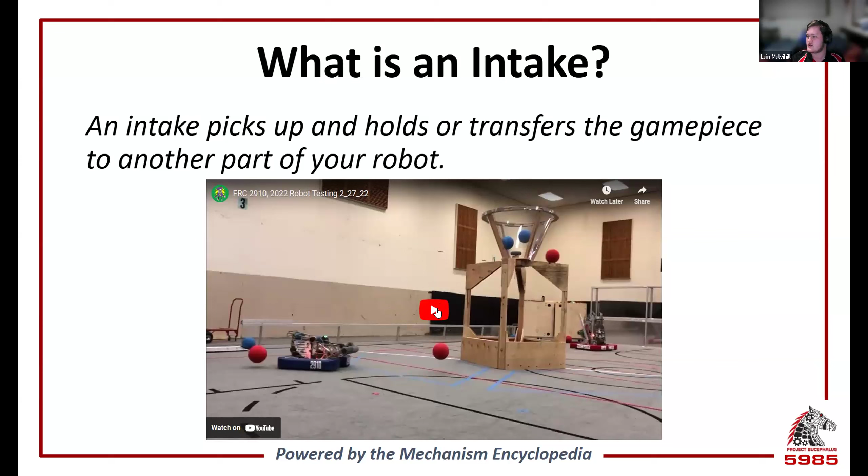Okay, this didn't automatically play, but this is an intake, intaking things off of the ground.

Again, it doesn't want to move on. Okay, now it wants to play. All right.

So today we'll go over some of the theory concepts involved in designing an intake, look at some of the design considerations when it comes to packaging, deployment, consistency, and end on some examples of popular or cool intake designs.

Some of the requirements we'll be talking about are functional and non-functional requirements, intaking from the ground, from the human player station, or not intaking at all. Touch it, own it. So wheels, claws, wide area of intake, active versus passive.

Different wheel types, different packaging types, deployment types, different designs that are going to make your intake more durable, things to improve the consistency of your intake, how you can prototype your intakes, and some miscellaneous notes.

Then we'll go into a bunch of different examples, which are pretty cool.

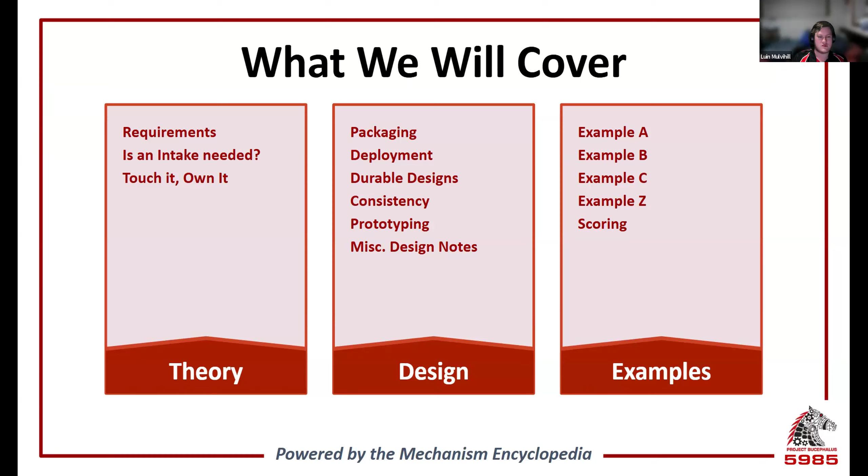All right, so let's first talk about establishing requirements, because you can't really design an intake or any mechanism for that matter without knowing what you need from it.

On day one of build season, when you first receive the rules, how do you go about this? First, you're going to need to figure out your game plan. So look for clever ways, or just the best way, of maximizing points, including ranking points scored, while keeping within your scope, which are the realistic boundaries of what your team can design and build with the resources, your people, skill sets, time, budget, etc. that you have available to you.

Then, following that game plan, we need to define what your robot needs to do, not how. So you're defining essentially your acceptance criteria for your solutions without trying to overconstrain your design. So here, consider the statements: we need to get the game pieces from the ground into the goal, versus we need a claw, right? Just notice that this is when you're discussing overall robot strategy.

We'll go into intake-specific requirements in the next few slides. This first sentence here is talking about what your robot needs to do in order to perform part of your game strategy and doesn't actually limit your design, while the second sentence goes straight into using claws without considering the other methods, which at this point in the build season, you probably haven't had sufficient time to rule out all the possibilities.

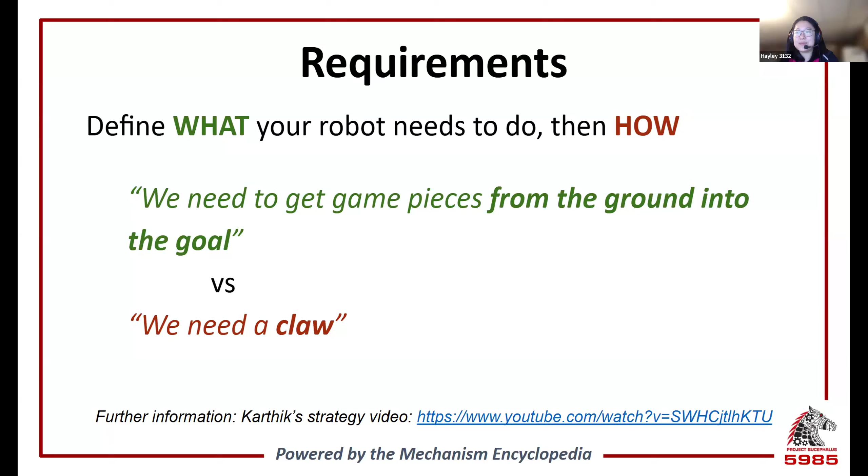So, once you've determined the what's, let's now talk about the how's. This is done via establishing your functional and non-functional requirements, which are kind of like the qualities of your robot.

As the name suggests, functional requirements define the functionalities and features of your mechanism. This usually depends on the game, and a little by the other robot decisions that you may have made so far when you're discussing your strategy.

When you're designing intakes and deciding what it needs to do, the main considerations are: one, game pieces. So what are their physical properties? How many do you need to worry about at any given time? You need to be designing a mechanism that can obviously control and intake the game piece, taking into account the shape, size, weight, etc. You also need to be considering how many you need to control at any given time. How many can you hold? Do you expect to need to intake multiple at the same time?

That one feels like a pretty obvious functionality, right? The second consideration you need to look at is the location that you're expecting your game pieces to be in. Once you've figured out your strategy from earlier, you probably also know where you want to be getting your game pieces from. For example, the feeder station or maybe an auto where the game pieces are located, whether it's from the floor or from an existing game structure.

But when you're looking at intaking from the ground, you also need to think about: is it going to be an open field, or are you going to be intaking right up against a wall, maybe even in a corner? Your intake design is going to change a little depending on what you want to be capable of.

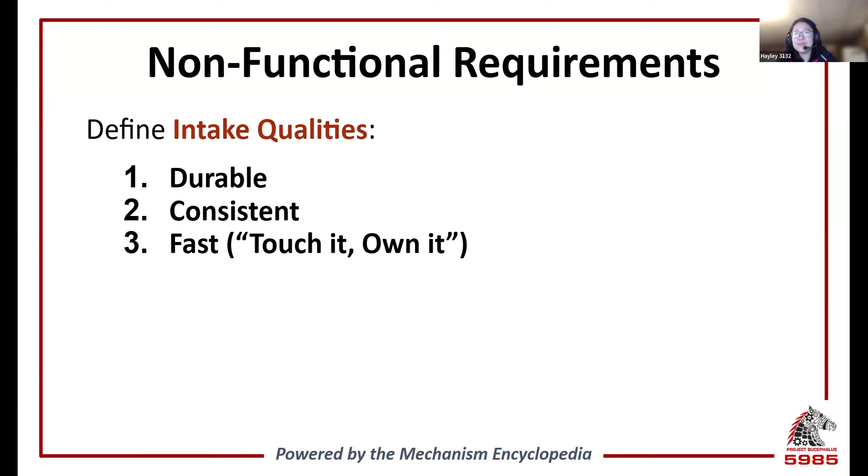Before we dive into the specifics of intake design, let's quickly talk about whether you need an intake at all. A few slides ago we talked about needing to establish a game plan—the strategy your robot is going to be designed for. One of the things you need to identify is what you'll be scoring and where you can get the game piece to score. Usually every season you can access the game piece from the ground, and these are the intakes we'll be focusing on today.

But they're not the only ones. Human player stations are locations on the field where you can load your robot in a relatively controlled manner, and something you see every year. Just note that this can also work with ground intakes—if you just drop the game piece on the ground, usually your ground intake should be able to handle it.

There are some exceptions to loading from the human player stations. For example, I think in 2016, the human players essentially had to bowl it down a lane for the robot to then pick up from the ground. So there was no option for you to load it in from the top.

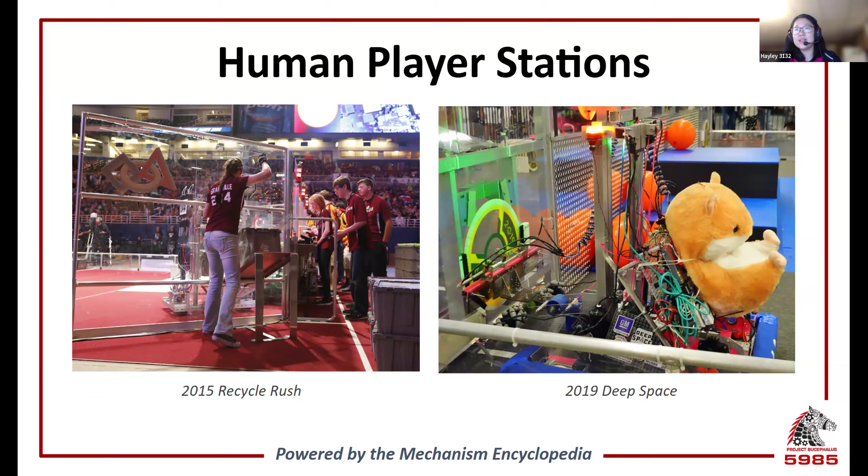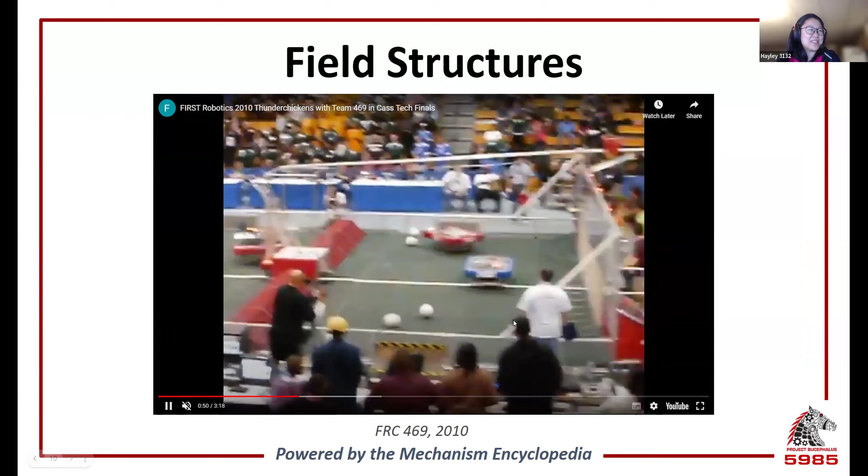But then in the case of 2010, only one team chose to get their game pieces from the field structures. This is a very clever robot that really didn't build an intake. See how the ball is falling from the ramp at the top into their robot, which was essentially just a ramp, and they scored it that way.

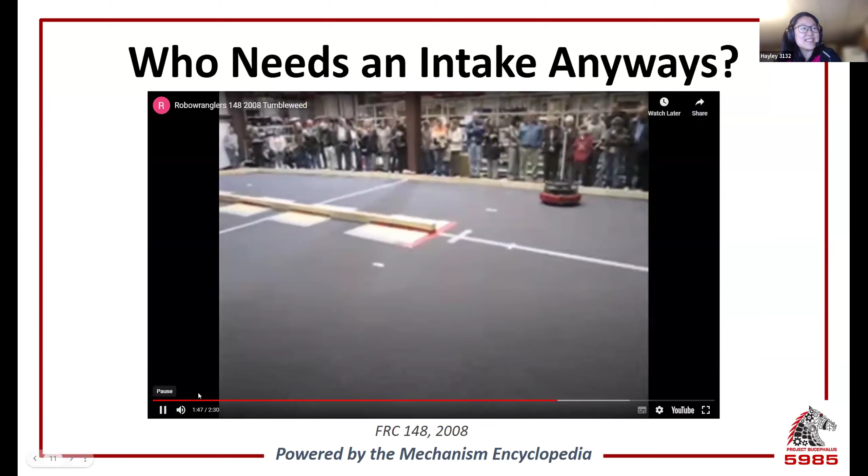So that's all well and good, but one year, one team decided to just build the fastest robot possible and not bother with interacting with the game pieces. 148 in 2008 decided to just drive around the field for the entire match, which was actually one of the ways that you could score. Yeah, and there it goes.

So the point of talking about all this is just to make sure you understand your game plan before jumping into designing an intake. They are a very common mechanism that you will see almost every single year, but they are not always needed, depending on your strategy.

Now, let's talk about intakes. The first concept we're going to talk about is this concept of touch it, own it, which is one of the most important intake design rules. You want to be able to drive at the game piece and end up with it in your robot or in your control. This means that as soon as your robot contacts it, it owns it and cannot be stolen by another robot or lost to collisions or anything.

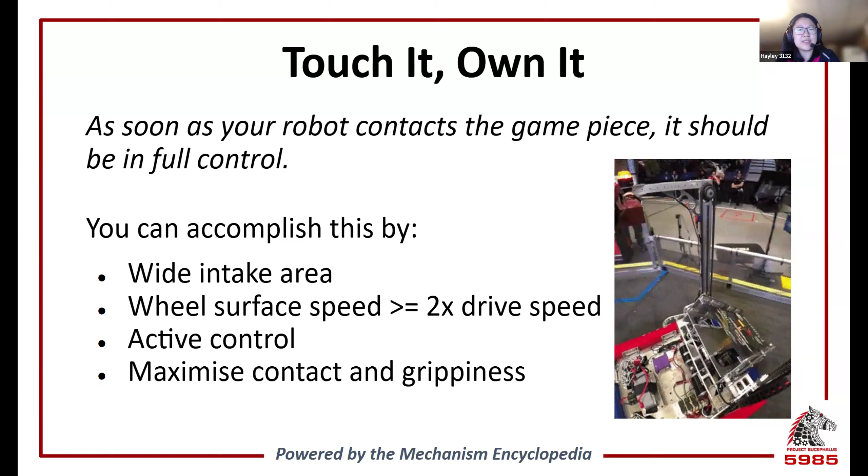We're going to explore 4 different ways that you can achieve this. One, we're going to look at having as wide of an intake area as possible, ideally the whole width of the robot. We're also going to look at the ideal speed of your intake, which is that the wheel surface speed needs to be greater than or equal to 2 times your drive speed. We're going to look at active control of your game pieces from the first moment of contact, and we're going to look at using wheels and rollers to maximize your contact and grippiness.

This first point: when you design an intake, you want your intake to have as wide of an intake area as possible, so that your drivers don't need to waste time and mental bandwidth on lining up to the game piece.

On the right here, notice how we have 2 different designs. That first one is a top roller design, whereas the second one has the wheels on the sides. Notice how it's much harder to get a wide area of intake with your side roller intakes.

But it's still possible. In this example, it's sprung with surgical tubing to widen the outer intake wheels when it's in contact with the game piece, which in this case was a milk crate. Luin is pointing out where the surgical tubing is, sprung from here all the way back to the frame. As these wheels make contact with the game pieces, they ride up the game piece and open to the width of the cube that year.

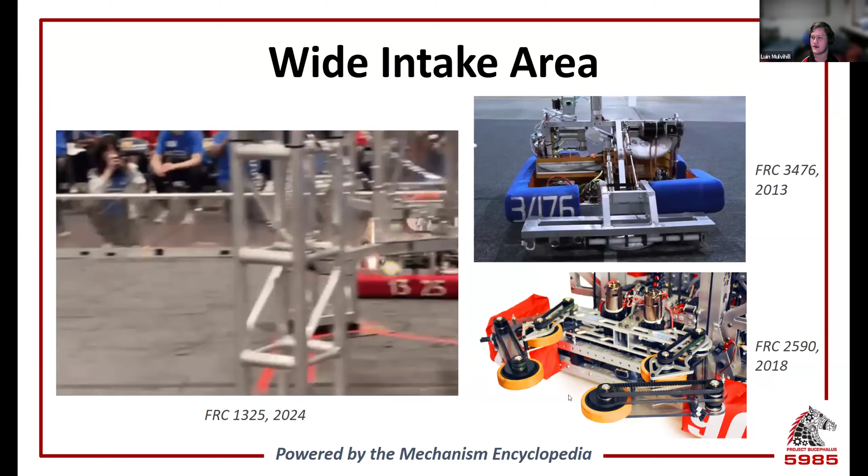Yep, exactly. But the whole idea of this is that you should be able to drive at the game piece's general direction and be able to have it in your robot.

The one problem with full width intakes is that you most likely need to center the game piece or index it in some way. Having the intake be the width of a single game piece means that you require more driving accuracy, but you don't need to index. So that's a thing to think about, but we'll look at some ways to index your game pieces in a moment.

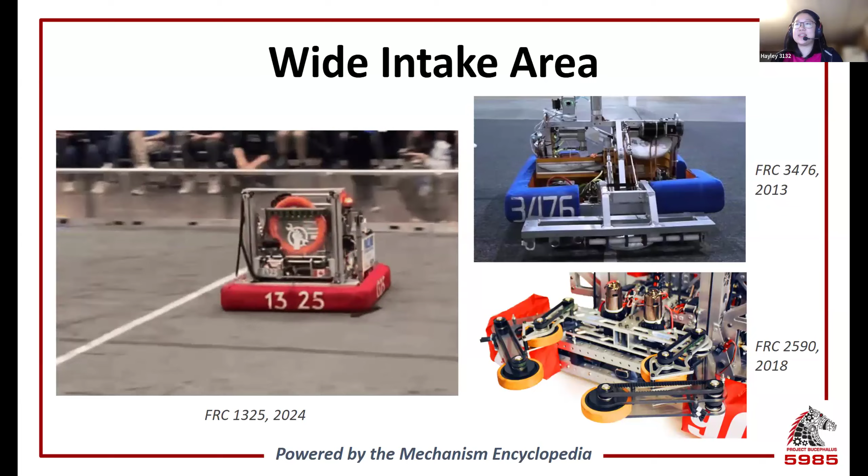The next thing we're going to talk about is this rule that gets quoted way too often, for good reasons, which is that your intake surface speed needs to be 2 times your robot's drive speed, at least. This applies to intakes with a top roller, to ensure that at all points in time, even when you're driving forwards at your top speed, your intake can still operate.

When you drive into a game piece, you want to make sure that the game piece is rolled towards and into your robot instead of your robot rolling over the ball.

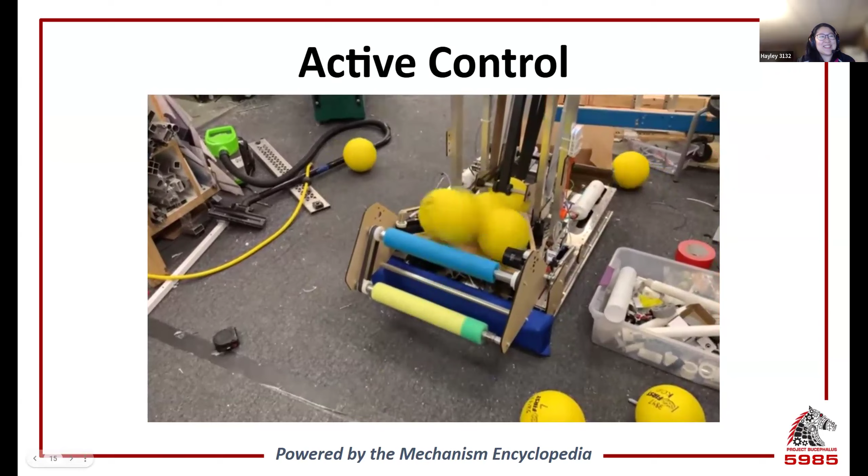Let's take a look at this video, and it should show you exactly why. The intake's working great, but the balls are going a little bit all over the place. Obviously this is just a prototype, I don't expect the end robot to be like this, but it shows why we need active control over the game pieces. We really don't want to design a perfect intake and then lose game pieces all over the place.

This is the last point out of the 4: compliance and compression. Along the same lines as active control, the last thing to consider when designing a touch-it-own-it intake is how you maximize your contact and grip on the game piece. For intakes to actually control the game pieces, they need to be in contact at all times to be imparting energy. To do that, you need to understand compliance.

Compliance is the ability of a mechanism to flex and adapt to external forces. In this case, it refers to molding the intake to the game piece, or molding the game piece to the intake, such that both are in constant contact regardless of shape, even if the game piece is slightly different in size, slightly damaged, or during high acceleration changes like collisions. This also results in a design that's really forgiving of variations in alignment.

Typically, for hard game pieces like the 2018 milk crates, you want to use compliant wheels and/or add compliance into your mechanism so that you maintain contact. For softer game pieces, teams can start looking into harder wheels or just a singular top roller to compress the game piece instead of the wheels.

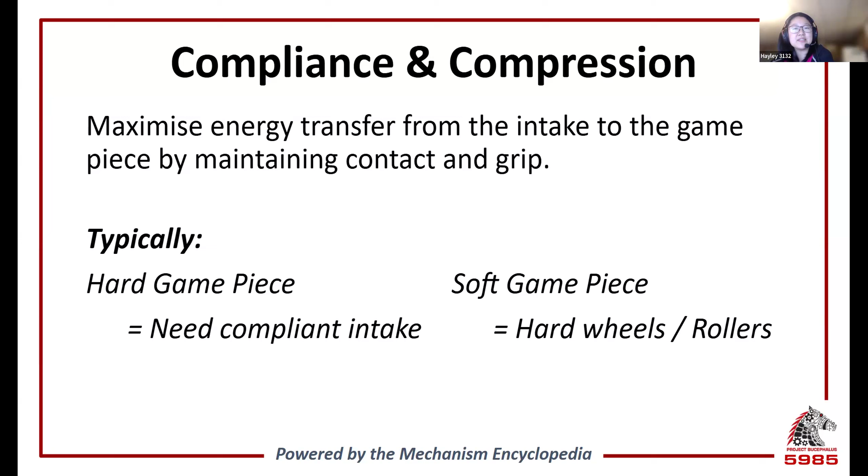One way to achieve compliance in your designs is by making your intake springy. This can be done using surgical tubing to allow the location of the intake wheels to dynamically change depending on the orientation or location of your game piece, while still maintaining grip on it. Here's 148's intake from 2018 as an example, where they can intake from any orientation because of the springy nature of the intake, even if it's slightly on a diagonal.

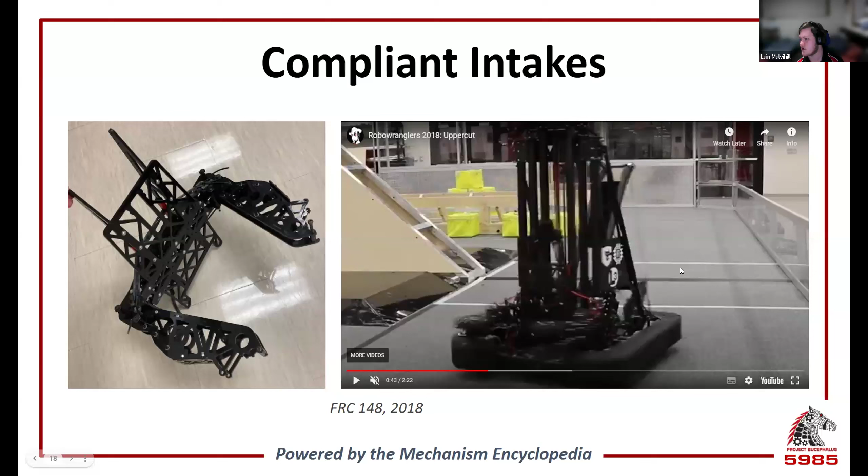You can see that when their intake, their elevator goes up a little bit, their intake is basically unlocked. And so then their arms swing around using that surgical tubing, and then you can see right there, they bounce back. That's the springiness in the intake, and that carries over for when they're intaking the game piece as well. They come in and that intake gets wider around the game piece until it's in its possession.

You can see here again, the intake actually can't be seen at all, and then it pushes its way out around the sides to then suck that cube all the way in, making sure that it owns it and it's not going anywhere. Again, you can see that when it does the opposite and puts out the cube, those intake arms spring back in, back to their original position.

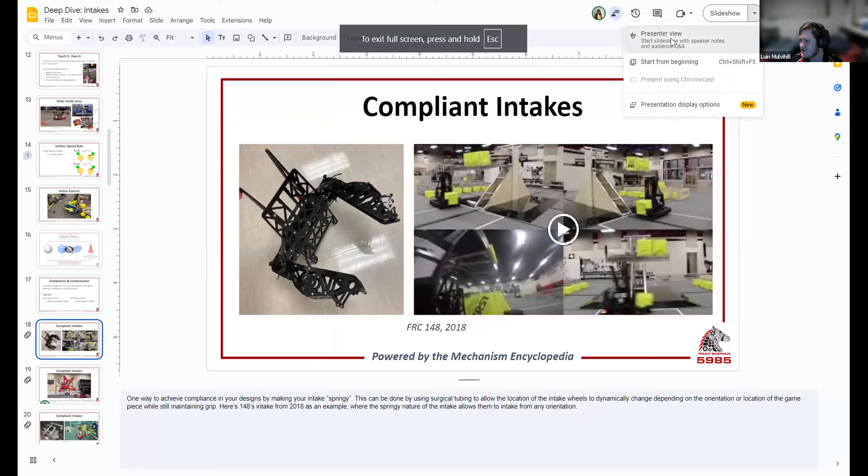Oh, okay, cool. Oh, no speaker notes. Not allowed? Yes. You're good?

All right, so this next slide here is just the same concept, but just showing you that this concept applies to intakes with a top roller as well as the side rollers.

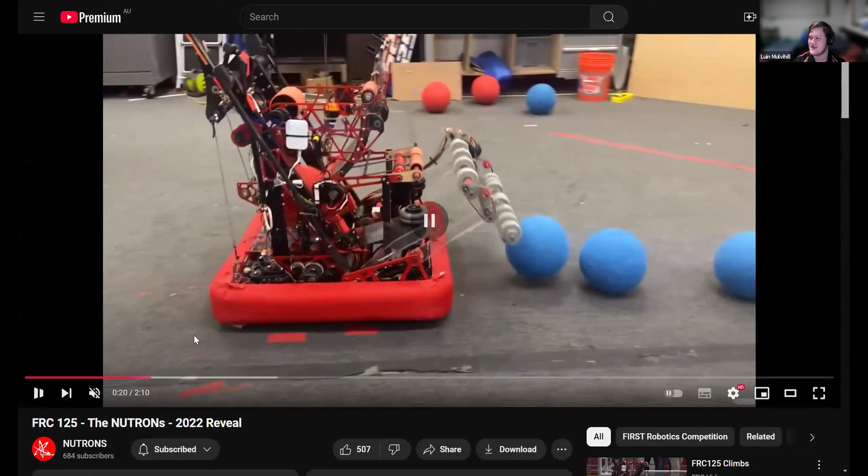So you can see as the robot is driving over the game pieces, it is complying with them and it is lifting the intake up, bouncing a little bit, which probably isn't ideal, but it does get the job done.

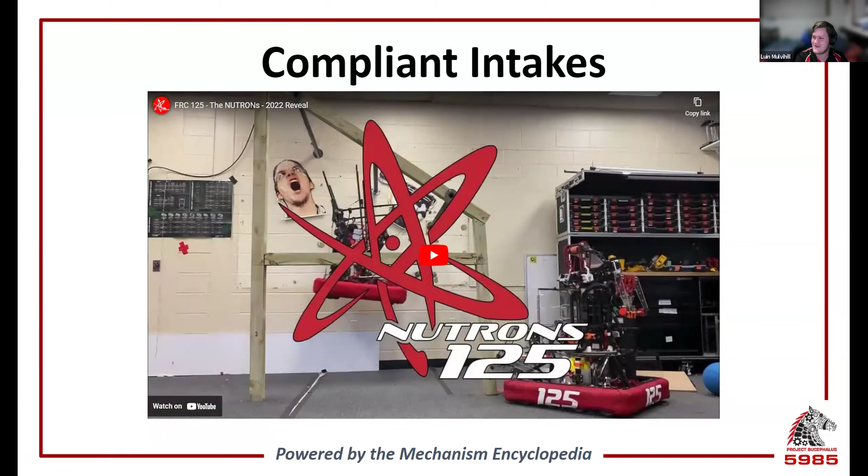I'm locked in here. Okay. There we go. I guess we'll watch it one more time. Thanks, Google Slides. All right.

So this next example here is 118 from 2018, where they are using pneumatics to achieve the same results, where instead of the surgical tubing, it's compressing air that's providing the springiness.

So you can see at the back here in this image, you have, well, there's like 5 pneumatic pistons back here, but these ones and these ones don't actually matter. There's one back here that when that actuates, pushes these arms in and out relative at the front, and then you can see as the game piece is being picked up.

Wait, can I do this? And then

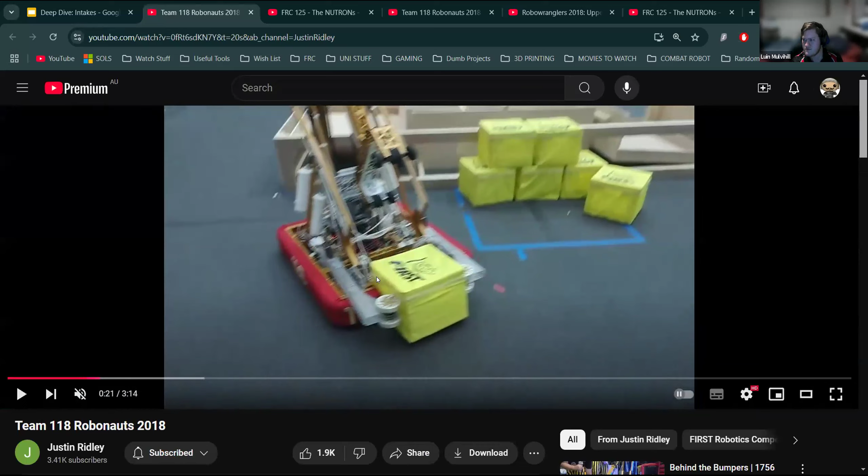As the game piece is being picked up, you can see the exact same behavior as the surgical tubing sprung one from 148. The wheels pop out and back in until it has that game piece right where it needs it and has full control over it.

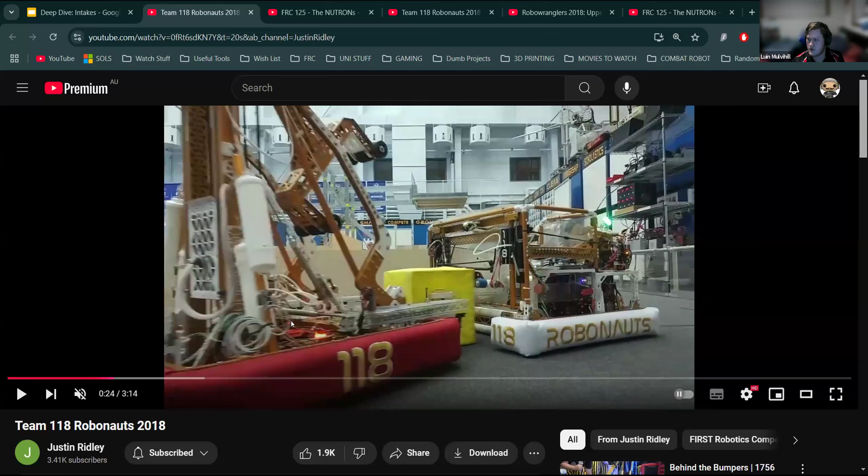You can see again here as it comes in, you can even see the pneumatic piston here in the corner. It's able to spring in and out, and this is because air is still compressible, so it can act like a spring.

Oh, okay, no, cool. I thought I played it from the beginning. Alrighty.

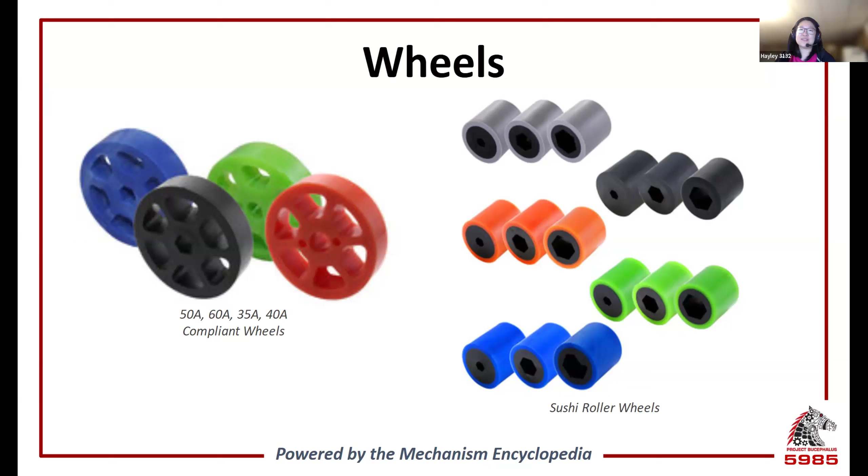So lots of teams don't use wheels for most of their intakes and instead are going to use rollers, which also can have something wrapped around it to increase the grip. This makes for a much more compact intake and lets you have the same reach along the entire width. Whereas using wheels, they are likely spaced out or you're just going to have a really heavy intake. But them being spaced out does mean that some sections are going to have more reach than others, which may or may not be what you're looking for, depending on the game piece.

Rollers are usually made from a polycarb tube, if you see any of the teams from the US. But here in Australia, PVC pipe tends to be more commonly used just because polycarb tubes are really, really expensive here.

I think, Luin, you were looking into some last time, and it was what, 200 for how much? 400 for 3 meters of 2-inch. Yeah, it was not good. Just a little bit too much. Whereas for the Americans, quarter of the price? Yeah, it's like $100 for 6 meters or something. It's nuts.

Unless the game piece itself is really grippy, like the 2020 game pieces, you are usually going to look to coat these tubes to get more grip onto the game pieces. Most commonly, teams will use silicone tubing, which is floated over the tube to give better grip. But in 2022, Velcro and cat tongue tape were the most common coating materials, where the game pieces were oversized tennis balls, and the surface was essentially the hook side of the Velcro.

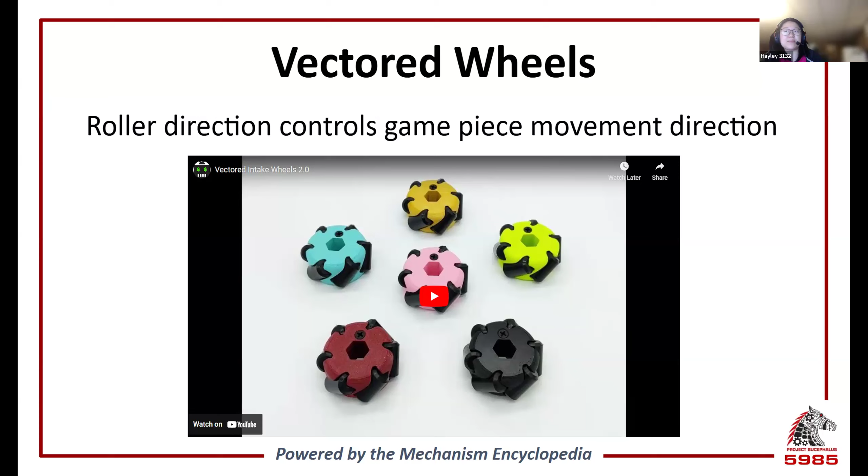Another common part found in intake design is a vectored wheel, which is a special type of wheel with passive rollers at 45 degrees around its circumference. The video should show it, but it'll pull in the game piece towards your robot, and then when it can no longer move in that direction, you'll see that it's pushed in the direction of the rollers. You can orient them so that they center the balls for you, or push them all to one side, depending on where they need to go next.

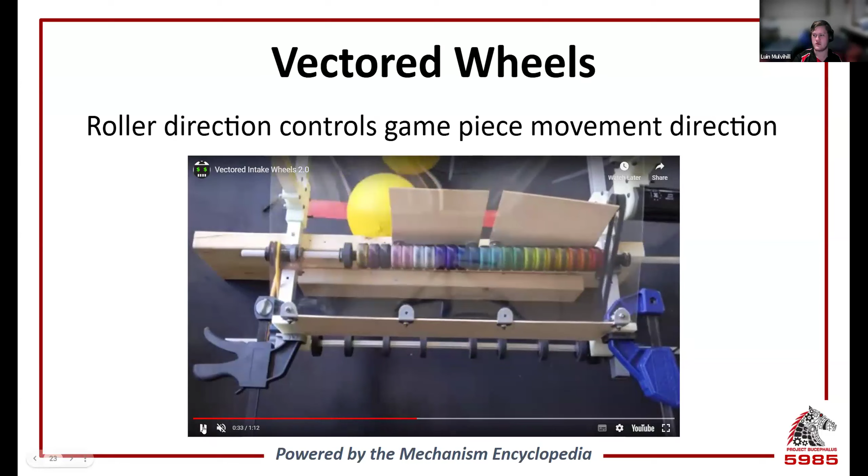So these ones are quite cool. You can actually 3D print them yourself as one part - these are all print-in-place rollers, which are pretty cool. We used them in 2022 to center our cargo, and yeah, they work really, really well.

Sometimes you're going to come across game pieces that are irregularly shaped. You might be tempted to consider claws for them, but remember, you do want to have control over the game pieces as quickly as possible, and it's far easier to do that with wheels and rollers than to try to line up with a claw.

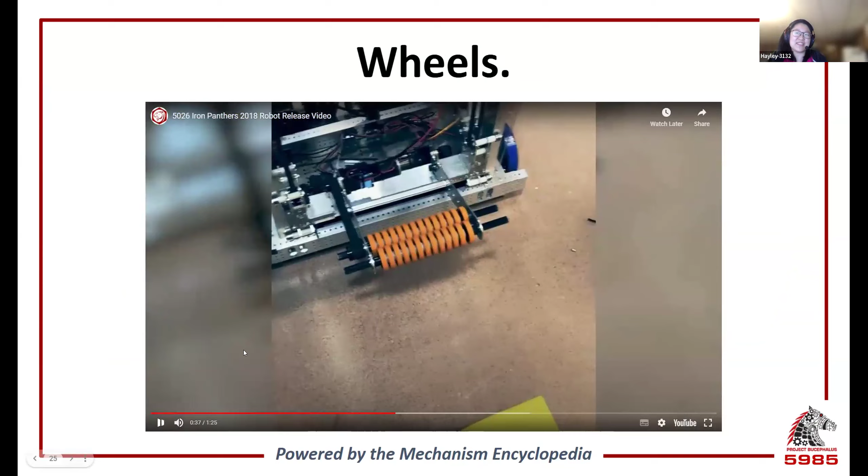And one last thing to try and convince you that wheels are the way - wheels can do some really cool things. When it came to 2018 with the milk crates, most teams built intakes with compliant wheels to grip onto either side of the crates. Some teams chose claws, and some teams used wheels to pick up the crates by pinching an edge of the crate by its fabric, like this one.

This unconventional style of intake allowed them to have a much lighter mechanism than the other teams, which was especially important because you needed to lift these game pieces up very high that year. Having lighter moving parts just makes your robot so much more efficient.

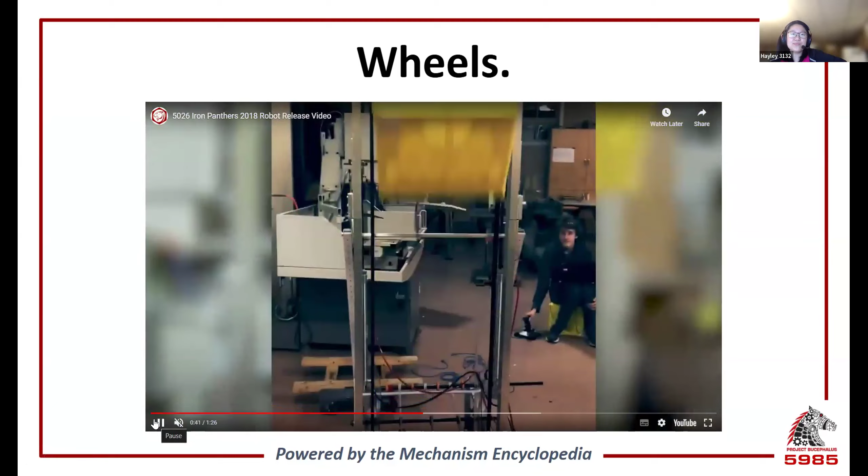So now that we've learned about how to control the game pieces, how do we package these mechanisms? Packaging is the art of fitting all of your mechanisms together within your robot's size constraints. And there are many things that you need to think about when deciding where you want them to go.

Some of the factors you must think about are safety and durability considerations. Can your intake be protected from collisions? What's the size of the game piece, can it go underneath your bumper? Where does the game piece go afterwards, into a hopper, or do you hold it in the intake and score it straight away? And where does the intake start and end? Does another part of your robot get in the way of that motion?

Keeping these in mind, we'll look at the two primary options for intake archetypes: the cutout, or under the bumper, and over the bumper intakes.

The cutout archetype involved using a cutout in the robot's bumpers and frame to intake game pieces through, meaning the intake can sit within the robot's frame perimeter without requiring deployment. This design was commonly used in seasons prior to 2024. However, with the introduction of the maximum bumper gap of half an inch for that year, and the continuation of this rule with the maximum bumper gap now being 1.5 inches for 2025, the cutout archetype has been made illegal, and I suspect it will stay that way given the speed of robots in the modern era.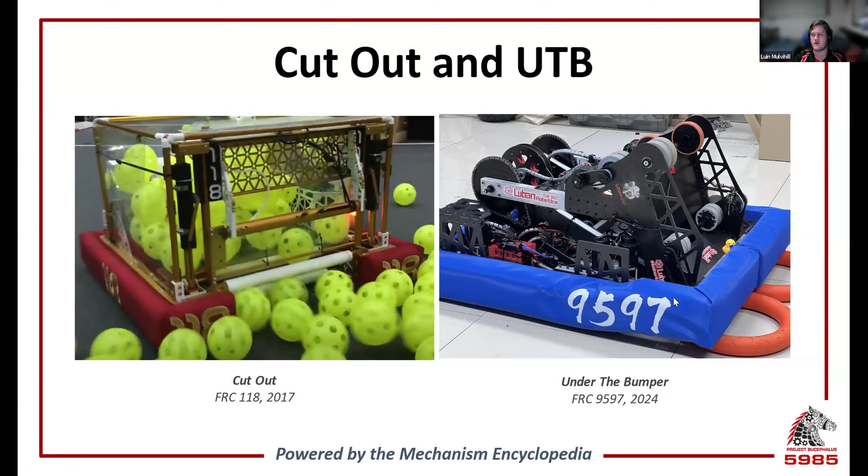So note that for under the bumper intakes, the lack of a cutout meant they were actually fully protected against corners, and you could have a full width intake. However, it either increased the design complexity or took out a large amount of space in front of your chassis.

So to negate the downsides of cutout or under the bumper intakes, you can deploy your intake over your bumpers. These are aptly named over the bumper, or OTB, style intakes. This makes your intake more complicated and less compact, as you must have a mechanism that deploys it, and it must be durable enough to survive impacts with field walls, elements, and other robots. But you're now free of the width constraints of the bumper gap, and you gain extra reach equal to that season's extension limits, generally 12 inches.

Because over-the-bumper intakes must be deployed over the bumpers, as the name suggests, you'll need to design a mechanism capable of achieving this. Typically, your intake will have two positions: position 1 stowed within your frame perimeter so you can start the match legally, and position 2 deployed, ready to intake a game piece.

There are three main types of intake deployment mechanisms we'll discuss: sliding out, slapping down, and the four-bar. We'll also go over the three primary methods used to deploy them: passively with gravity, springs, and surgical tubing; actively with pneumatics; or actively using motors. Each of these deployment mechanisms and methods have their pros and cons, which we'll discuss over the coming slides.

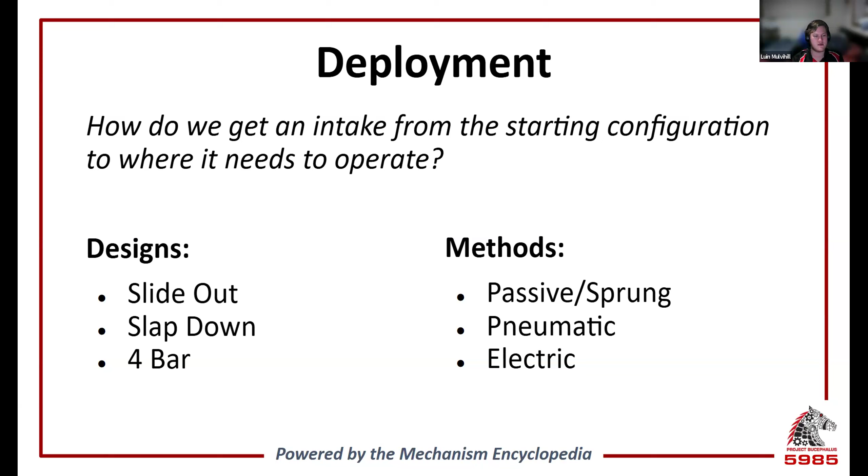Slide-out intakes are probably the least common deployment designs used in FRC, because they're really only explored when you require the vertical space in your robot for the rest of your mechanisms. This is likely due to the way they package, as early on in the season, when you're planning your design, you block out space for each mechanism, and blocking out a horizontal slice for the intake makes it harder to conceptualize how the rest of the robot goes together and how the mechanisms integrate with each other.

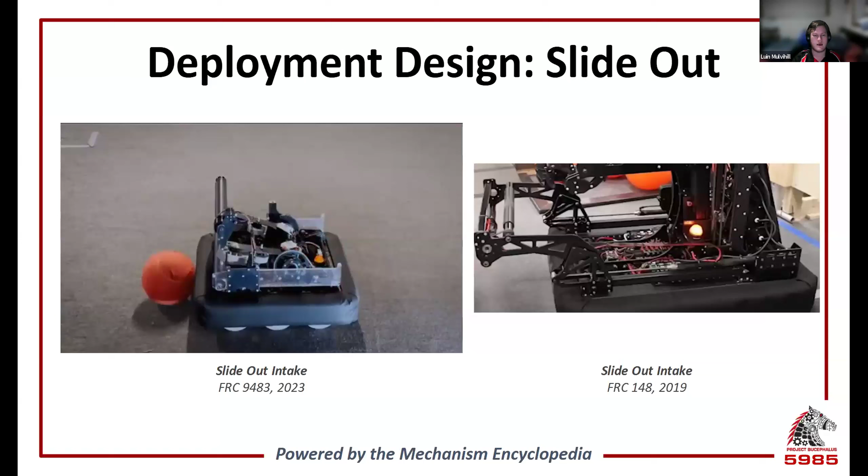The primary downsides of a slide-out intake are that they can take longer to deploy, as they generally have to cover more ground than a typical intake does, and they can take up a large amount of space across the robot.

So here we have 148 in 2019. The entire side, several inches of their robot, is taken up by this slide in-out mechanism. Same with this little mini bot from Lynx in 2023. They are shooting a 2022 cargo ball, but this is a 2023 off-season robot that was designed to shoot the little inflatable cubes.

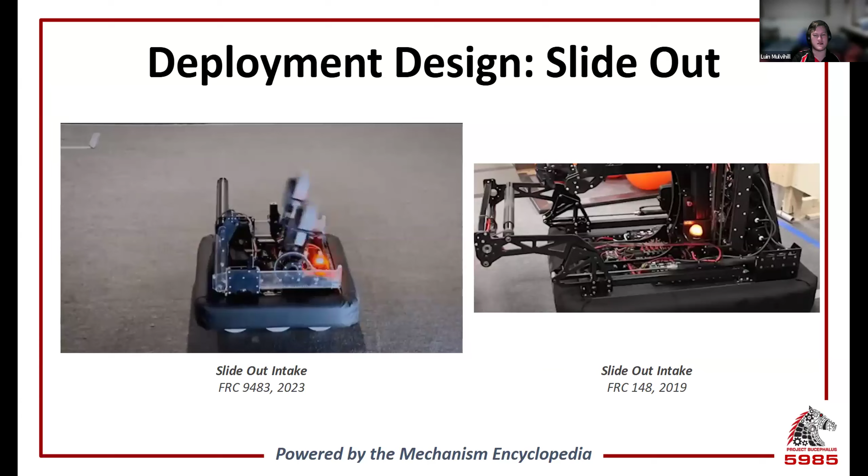To avoid these downsides, most teams choose one of the two pivoting intake options, as they're generally easier to design and package anyway.

The first pivoting intake deployment design we'll look at is the slap-down intake. It's the simplest of the deployment methods, as it involves the intake rotating around a single pivot point. The location of this pivot point can be almost anywhere on your robot, so you can pick the geometry that works best for you.

Slap-down intakes are generally also the lightest and easiest to package, making them the most common intake type seen in FRC. The main downside of the slap-down intake is that sometimes the area of the robot the intake would pivot up into is occupied by other mechanisms.

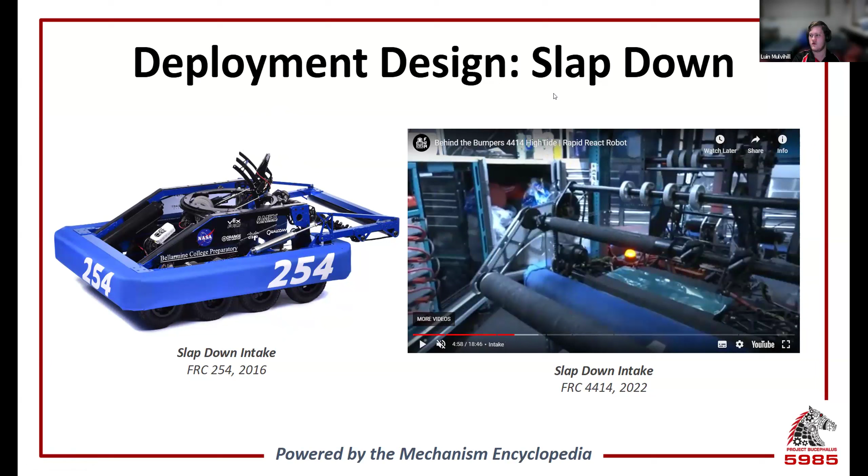Over on the left here we have 254's 2016 robot. They have a pneumatic piston on either side that pulls back at this point. The intake pivots around here, so as this gets pulled back, the whole intake lifts up and stows vertically in front of the robot. But as I mentioned, sometimes you'll have something in this area that you don't want the intake all the way up into - you'll need something a little more low profile.

There are a couple of different things you can do with a 4-bar. You can design it so that where it is stowed, it is on the same angle throughout the entire travel - that's a parallel 4-bar. But you can also design it so that your start position and end position have two different orientations.

There are quite a few resources out there on how to design 4-bars. The way I've done it in the past is just trial and error in CAD - probably not the best method. I'll link a video in the chat right now that I stumbled across researching this, that helps with how to design a 4-bar.

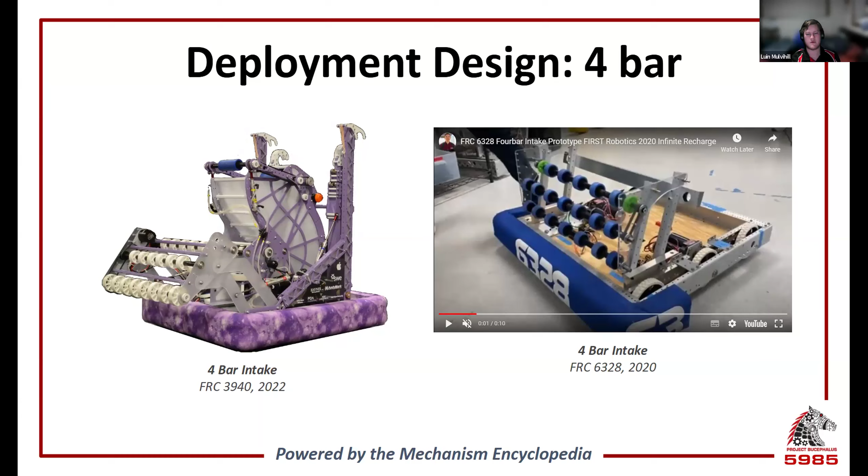As I said, one of the things you can do is just test and trial and error. One of the ways you can do that is by using adjustable plates when you're prototyping, but we'll talk about that a little bit later.

We'll move on to the first deployment method, which is passive. A passive deployment relies on either a jolt of your robot at the start of the match or movement of some kind of mechanism to dislodge the intake. Once it's deployed, it will stay outside the frame perimeter the entire match. This leaves it susceptible to damage, so it's probably not the best. But if you're running low on motor count or you don't want to use pneumatics for whatever reason, this is one way to do it.

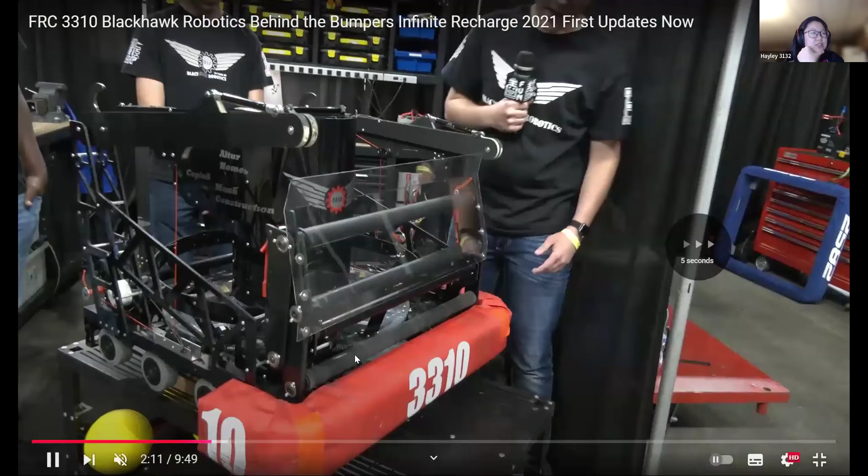So these guys will... I'll open this up, this will be easier. Are you sharing sound? I think they talk about it in this clip as well. I am not sharing sound, I forgot to tick that box. All right, all good.

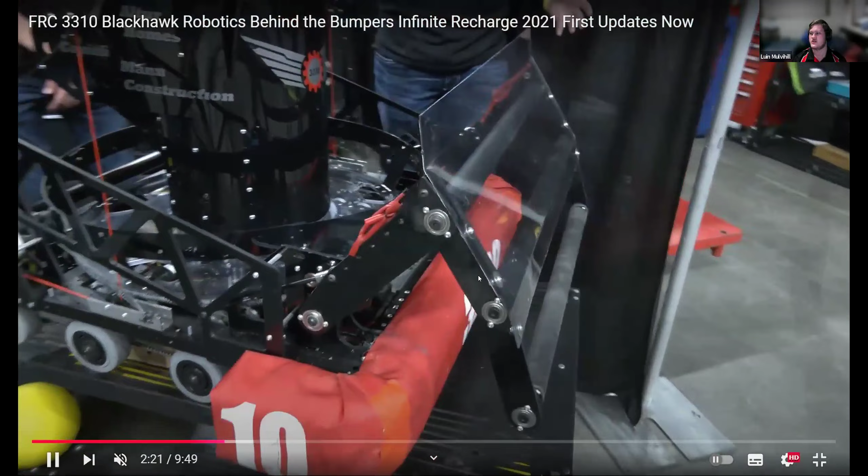You can see here they have a gas strut, which is basically a pneumatic piston that isn't connected to your pneumatic system. It has compressed air inside that always wants to push out, acting basically as a spring. They also have surgical tubing that again acts like another spring. As their indexer hopper spins around, it unhooks the intake. Because they have a spring here and a spring here, it pushes the intake out and deploys it passively, without any pneumatics or motors driving it in and out. So they're using the pre-existing motor for the hopper to deploy their intake at the start of the match. It then stays out the entire time, which they designed for by making it out of polycarbonate, really thin, lightweight, and robust, which we'll go more into regarding durability a bit later.

Oh my God, why does it do this every time? I'm just going to start the video and then skip through. Yeah, okay.

As mentioned previously, intakes can usually be viewed as a two-position system. One position is stowed and the second is deployed, ready to intake. This perfectly suits the applications of pneumatic cylinders, as they have two states: extended and retracted. This makes design relatively simple, but designing around the pistons you have is a bit of a challenge sometimes.

Keep in mind that if you have a pneumatically actuated intake, you'll require a large number of air tanks because you'll be deploying and retracting it many times within a match. Also, pneumatics are very susceptible to damage. If you have your piston sticking outside your frame perimeter and it gets hit and bent, you will very likely not be able to use it anymore. Even if you bend it back, you'll generally have some misalignment and it will get stuck trying to pull in or out, or the seal will be broken and air will leak through to the other side.

On this side, we have a pneumatic 4-bar, which team 5985 designed in 2022. Can I loop this? I can. We have some pneumatic pistons here and one here that connect to the top bar of the 4-bar. Then the bottom bar is here.

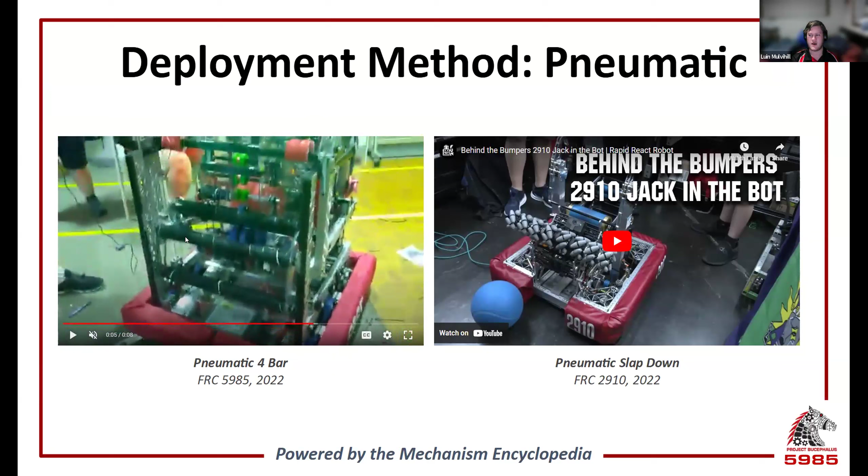As the intake comes back in, this bar is being pulled back and the rest follow. In this case, this was not a parallel 4-bar. When the intake is out, we have a steeper angle than when it's retracted. This was so that we could have the correct angle that we found during prototyping, while still being able to fit it within our frame perimeter when stowed. As you can see, these are PVC pipe live axles coated in Velcro tape.

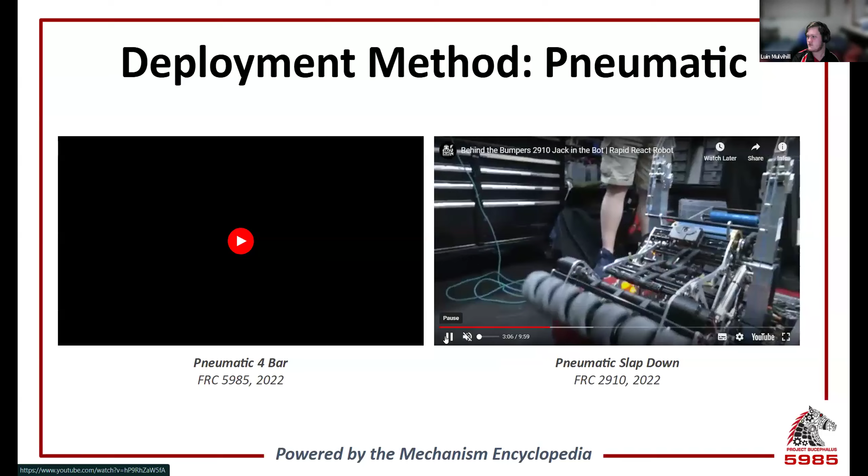Actuate, there we go. As their piston actuates, their intake bar pivots around a point down here, which brings it down, ready to intake a game piece. Now if we run this back, you can see they're using vectored intake wheels which suck it in, and when it goes up against the bumper, it pulls it across and in. You can again see that they have a bumper cutout. This means they don't have to pull the ball up as high, so it can have a lower profile robot. But as I mentioned before, the bumper cutout is a little bit dead now.

And you can see that when it comes back in, it pivots up again around the same point.

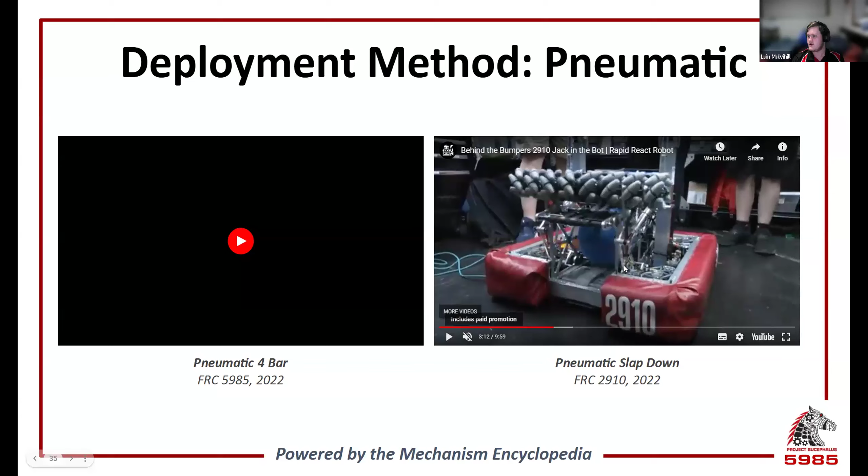There's the intake going up. It pivots around here, bringing it up and back within the frame perimeter. Okay, now, there we go.

Although pneumatics is great for being two position, sometimes you're only going to use your pneumatics for your intake and nothing else. Then you need to take into account how heavy a pneumatic system is. You've got your compressor, your air tanks, your cylinders, and all the associated tubes and fittings, and it can get quite heavy.

And so if you're only using it for your intake, it's not really worth having it on there. So the method that's becoming more common is using a motor to pivot it. This 4-bar is being pivoted by a motor via this axle here. The motor is down here, and the chain connects the two. As the motor spins, it rotates the chain, which pulls this axle along, and just like how the piston pushed the top bar of the 4-bar, this axle drives that top bar.

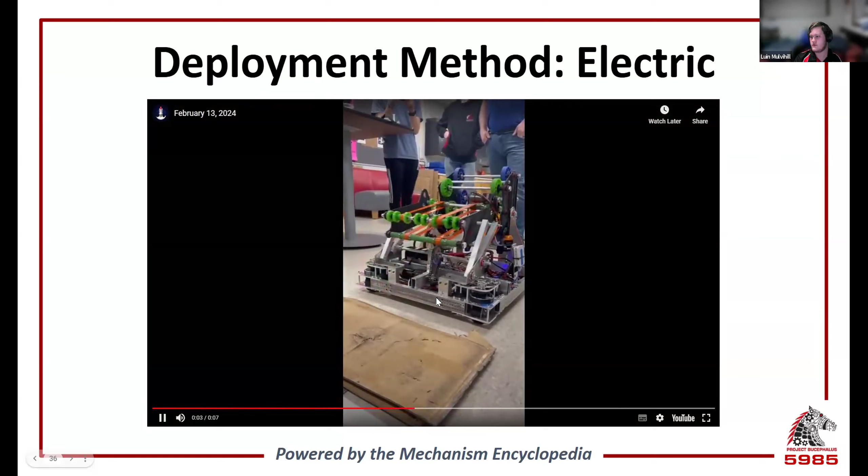So this is now becoming the most common method. I believe the switch started happening towards motor power to drive intakes when they mandated that the compressor had to be on the robot. Previously, you could have an offboard compressor and a whole bunch of tanks that could just power your pneumatic cylinders, but now you must have the compressor on there, which adds like 2 or 3 pounds. It's a very heavy chunk of metal.

So using motors means that you don't need pneumatics. If you don't already have pneumatics on your robot, it means you don't have to add them. It also allows for rapid and precise positioning for your intake. It also means that if you want multiple positions—for example, if you wanted an intake that picked up off the ground, was able to stow within your frame perimeter, and also poke out to score in the amp—you could do that.

In this example, the intake is being pivoted by a chain and sprocket system in the center of it, but it can also be done over to the side. I guess we'll watch it again.

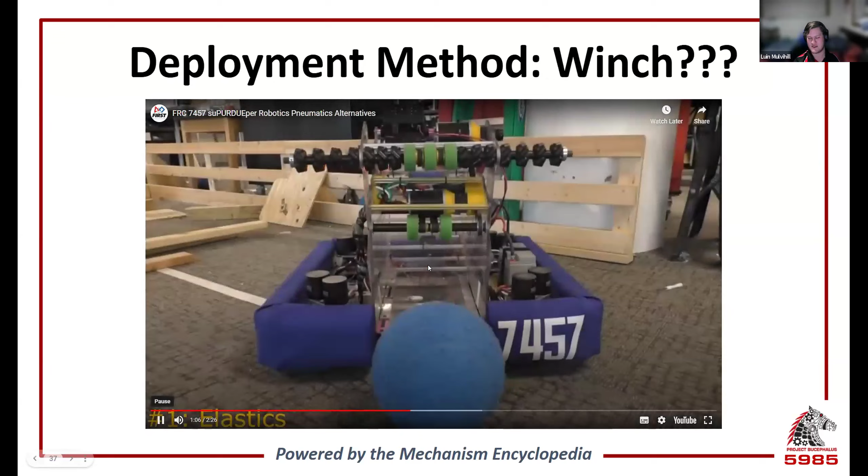Another way to deploy an intake using a motor is a winch. This isn't really recommended because it can be slow and get tangled, and it relies on gravity. But you can see up here we have a winch with a cable that pulls the intake up and then releases it down. Very, very simple, but again, not really recommended.

Going back to our discussion about requirements from earlier, the first non-functional requirement we prioritized was durability. Why? Well, for an intake, it's guaranteed to take hits, so it needs to be designed with that in mind. Consider it the second most important part of the robot after the drivetrain, because if you can't pick up a game piece, there's not much you can do in terms of scoring it. If your design sticks outside of your frame perimeter, it needs to be designed with robustness and serviceability in mind.

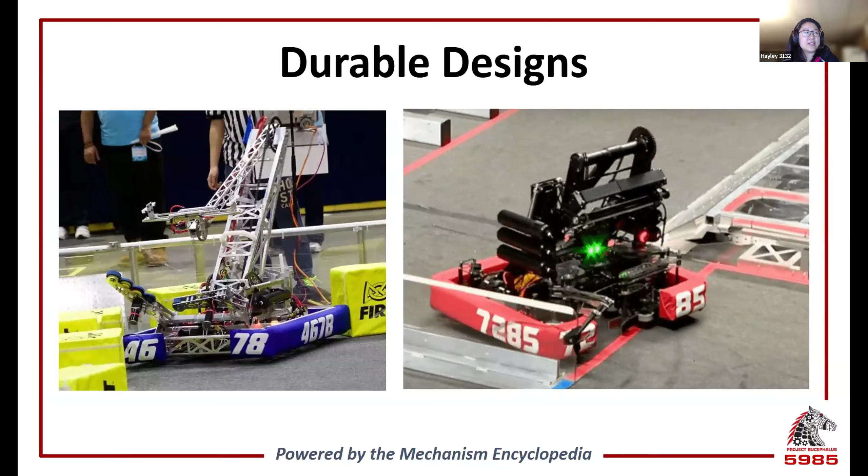Looking at materials, more for over-the-bumper intakes, the material you make your intake from matters a lot. I saw Mel typing in chat earlier about polycarb—that's exactly what you want to be using for your intake. Essentially, you want to make your intake as durable as possible, but you also need to decide if you want to make it compliant or rigid. Compliance means when it gets hit, it bends and flexes back into its original shape, which polycarb is really good at doing, and generally we'll be using the 6mm polycarb sheets.

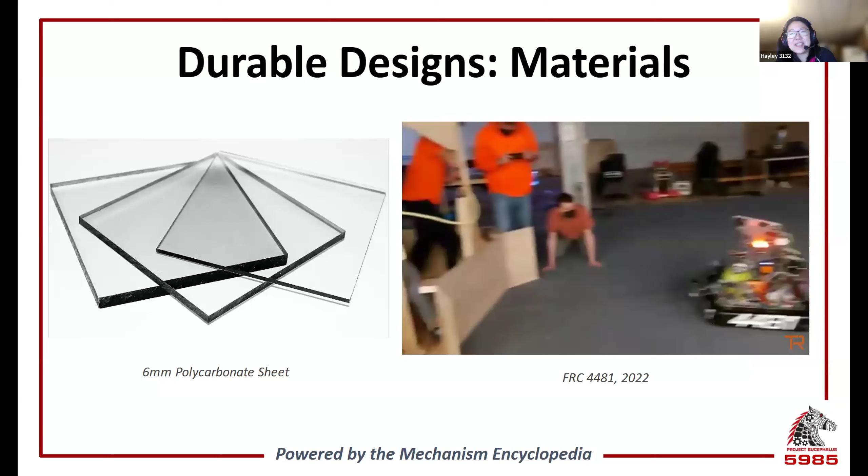Rigid means that when it gets hit, it doesn't move at all. Some teams choose to go this path and make their intake from thick aluminium plates and tubing with thick walls, which makes it highly resistant to bending. But it also means that if it does end up hitting something and bending, the intake is going to stay bent—it will permanently deform, which could potentially mean you're no longer able to use that intake and need to bring spares.

Yeah, let's go to the next slide. Maybe if it wants to. Okay, there we go.

So, similar to the last video, you want to be testing multiple times. You want to be testing your design before comp—stress test it. If it breaks, it probably was going to break during the chaos of comp anyway, and you're going to know from this testing what to redesign or bring spares of.

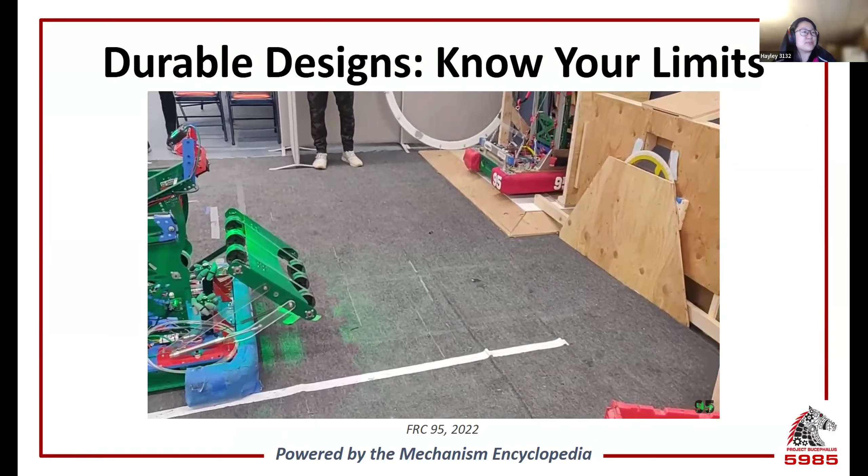Why does it take like 3 presses to make it change a slide?

When designing, you're also going to need to keep in mind where and when impacts are going to happen, and also use that to figure out what important or expensive components you're going to need to protect.

Using pneumatics as an example, we talked about using pneumatics to pivot your intake. If you can, you want to design your pneumatics so that they're closed when your intake is extended. This is because your intake is going to take impact when it's extended, and you want to protect your pistons, which are most vulnerable when they are extended.

So in this example, we have our piston that is retracted when the intake is out, and when this piston extends, this is the top bar of the 4-bar linkage. You've got one here and one here. As this goes up, the whole system pivots in to be within the frame perimeter. By putting the piston in front of this bar instead of behind it, like in the 95 example, we're able to have it retracted instead of extended whilst deployed, protecting it fully from being bent.

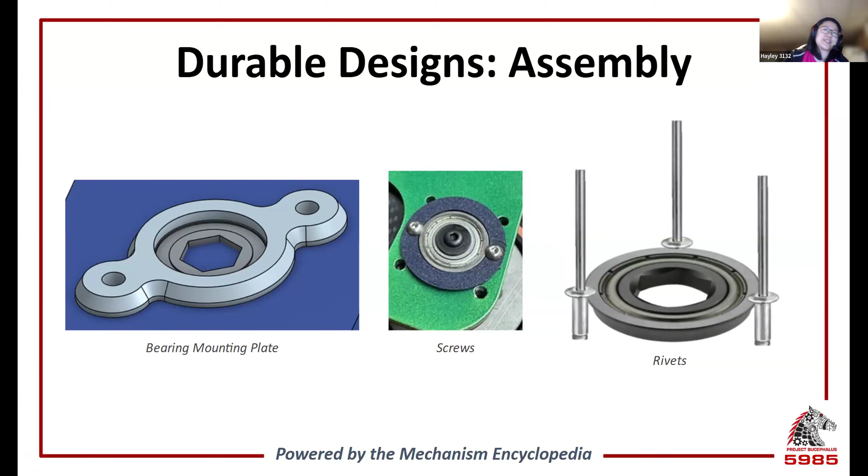Luckily, this is pretty easily avoidable, and here we have 3 common solutions for securing the bearing. You want to secure it via the flange, or the outer part of your bearing, because the inner part is going to be spinning and you don't want to be rubbing on it. You can have a bearing mounting plate bolted to your intake plate, bolts with washers or one large printed washer, or as a last option, rivets - riveting the outer race of the bearing to your design.

The other thing we were talking about from the requirements earlier was consistency. This means your intake needs to perform the same way every time.

With an over-the-bumper intake, you want to deploy the intake during the match to pick up a game piece, then retract it back into the robot to keep it out of harm's way. You can do that with sensors combined with hard stops, to prevent the intake from destroying itself when it's doing that.

You can use sensors to detect when your game piece is coming into the robot, and once you know the game piece is in a place you can control, you can bring your intake back up into the robot. That's a process that can be done automatically without your drivers needing to think about it.

The sensors you're most commonly going to look at are beam breaks or color sensors, which will detect when you have picked up a game piece.

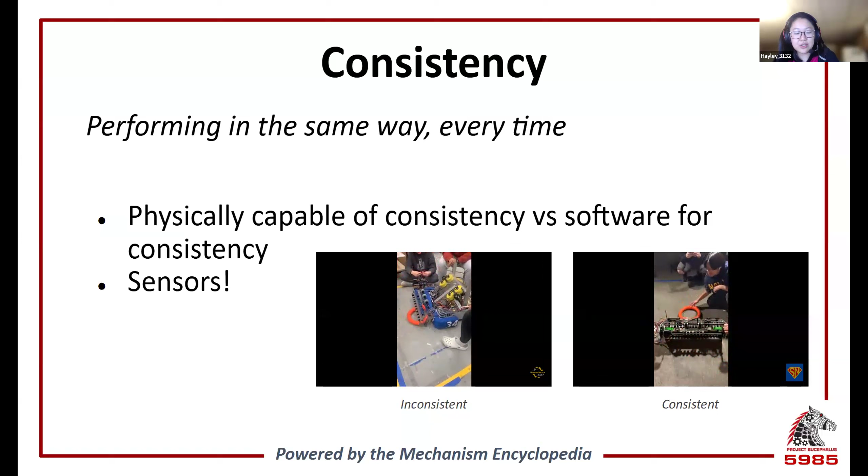You also need to consider how many game pieces you can hold at a time. Some years you can only hold one, other years maybe a couple. By having sensors, you can count the number of game pieces coming into your robot and tell your intake to stop, or start outtaking, if you've accidentally picked up more.

As we briefly mentioned earlier, prototyping is a great way to figure out your compression, correct heights, distances between rollers, size of rollers, and which type of intake to use, all of that sort of stuff.

I will put the link to this Chief Delphi thread in the chat. It has that model, and you can download it on Onshape as well.

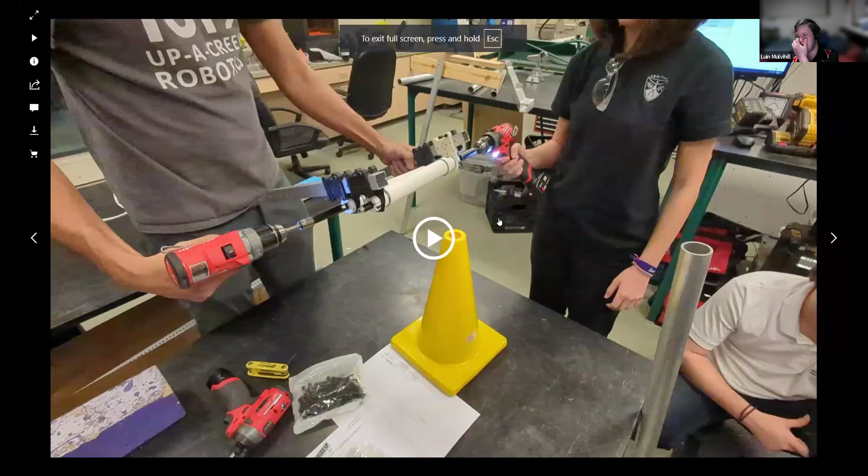For prototyping, being able to quickly adjust all of these things on the fly is pretty key to doing it quickly. Also adjusting them in a way that you can come back to them next time and record what you've done — I see too many teams just clamping their testing down and then not knowing how to exactly replicate it again next time.

Another way to make it adjustable is by using 3D printed clamping blocks. These blocks have bearing holes, and you can undo these to loosen off the clamping and then slide them all around. This is Spectrum's prototype, so they could loosen these off and slide it if they thought they had too much compression, or slide it in closer if they didn't have enough.

This whole prototype is another example of using rollers or wheels instead of a claw. Even for a funky game piece, try to exhaust all of your options to see if you can use wheels or something similar to pick it up.

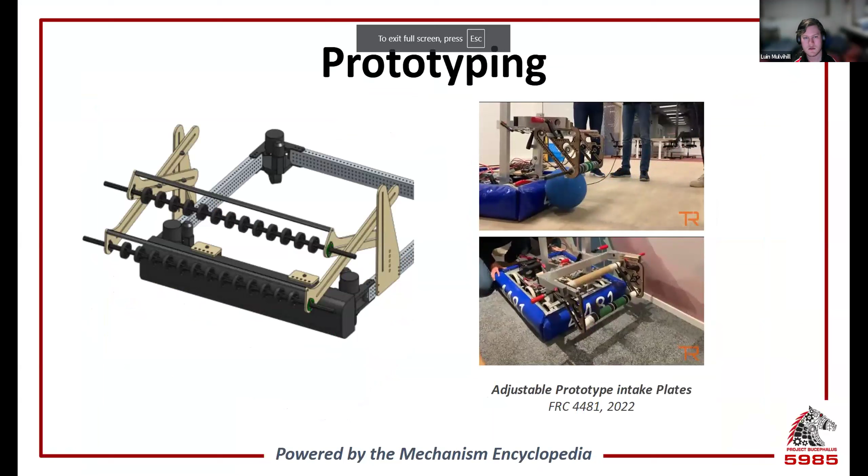Next we have intake outtake. For most intakes, you will just be intaking the game piece, putting it into your robot, and then it goes into a hopper or some sort of area to wait to then be scored using a shooter, or it's handed off into another claw or something to then be scored using a different mechanism.

But what you can do, like 118 did in 2019, is have it be both. So this was their intake. They had it intake a ball, and then they held the ball in here and went and scored it just by spinning these in the opposite direction. So they were able to use the exact same mechanism for both intaking and scoring.

Before we take a look at some example intakes, we'll quickly discuss why. One of 1678's golden rules is steal from the best, invent the rest. I think we should probably listen to 1678 and their golden rules. They currently have a 10-year streak on Einstein, so they've clearly figured out what makes a winning robot. This piece of advice isn't specific to intakes either; it really shows the importance of doing your research on existing work and using your time in the most efficient way. It all comes back to the phrase, don't try to reinvent the wheel. There are currently existing solutions out there that work extremely well. It's all just about finding what's already out there and building upon that.

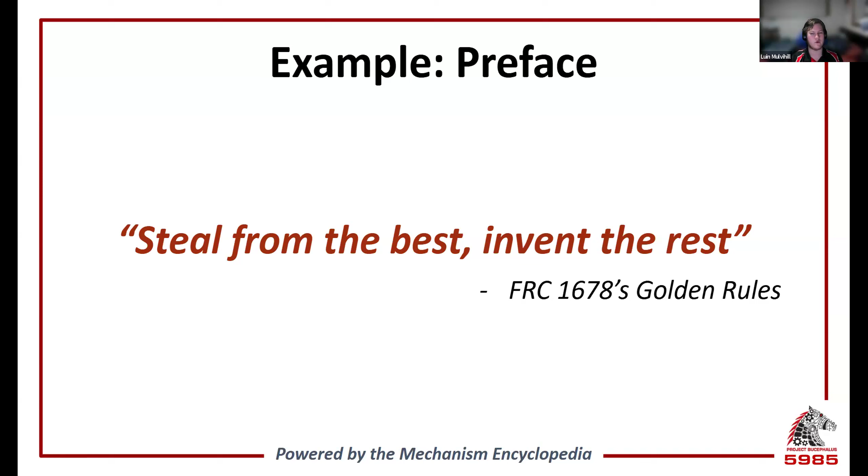This first example is from Team 125, the NUTRONS, for the 2017 game.

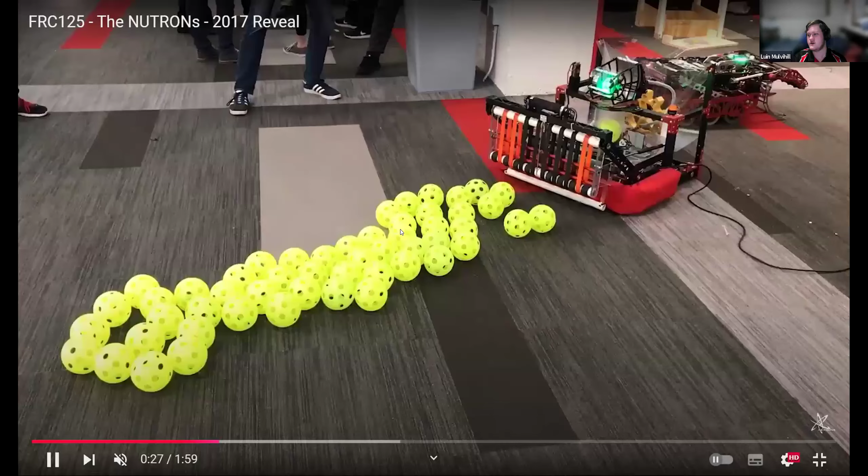You can see they had a passively deployed intake. There's this bar here, and as they move that bar down, the gas struts push their intake out. So this is now stuck outside of their frame perimeter, and must be able to take impacts from other robots. Those who tuned in to last week's presentation will see they have some polybelt on here to help bridge that gap and suck in all the balls really quickly. They also have a gear intake.

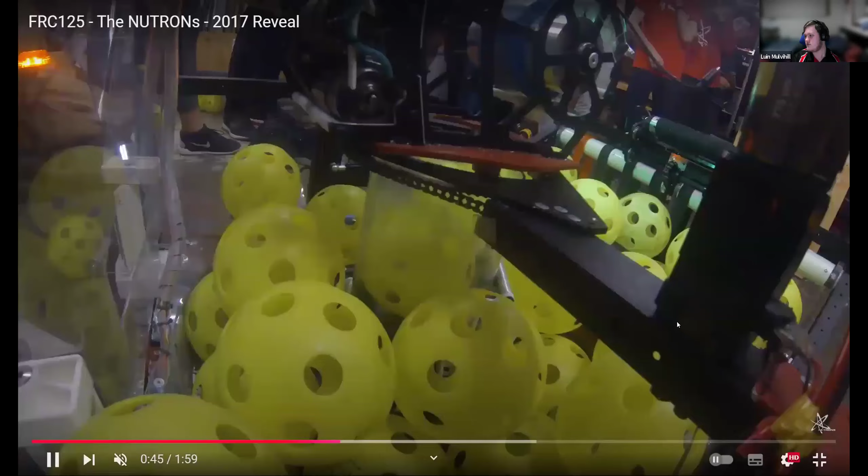This would be the human player station ramp from 2017, and the gear just drops down nicely into that. What actuated their arm to deploy the intake? I feel like it was their hopper, because these are all gas struts along here. This is a very cool team, very cool intake, and their hopper was also quite ridiculous, similar to 971's that year, which is next level, even for 971.

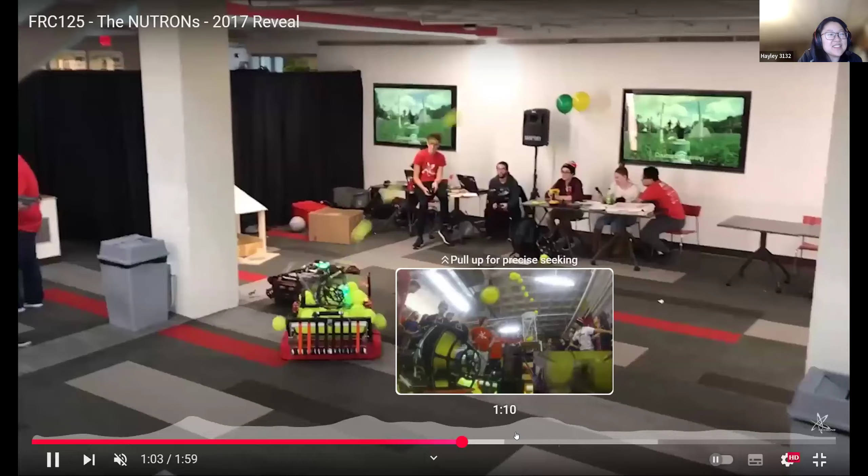I will quickly point out that gas struts look very similar to pneumatics, but they are not the same. They look like pneumatic pistons, but there are no tubes coming out of these. They are compressed with, I believe, nitrogen, and so they always want to push out. You can buy them in different strengths. Back at our workshop we have quite a few different gas struts. They can be a little expensive, but they're very cool if you have a use for them. The deployment just looks so cool.

Anyway, we'll jump over to the next one. Maybe. Okay, no, it's good. All right, we'll now just go slide by slide and open up the video itself.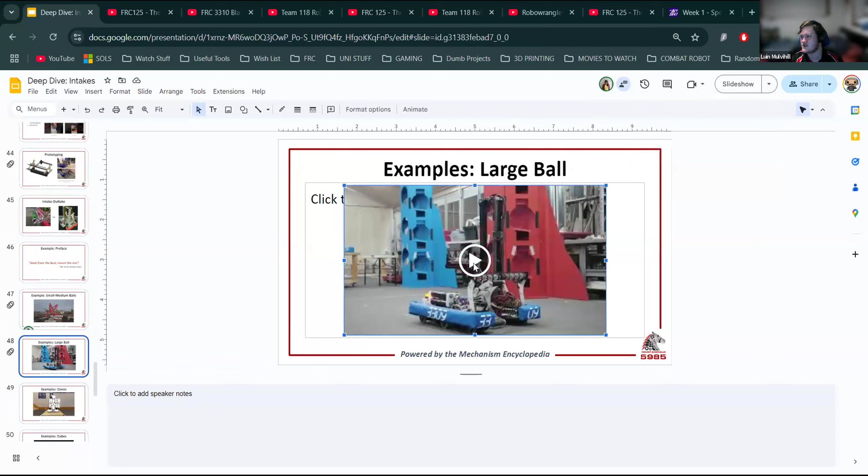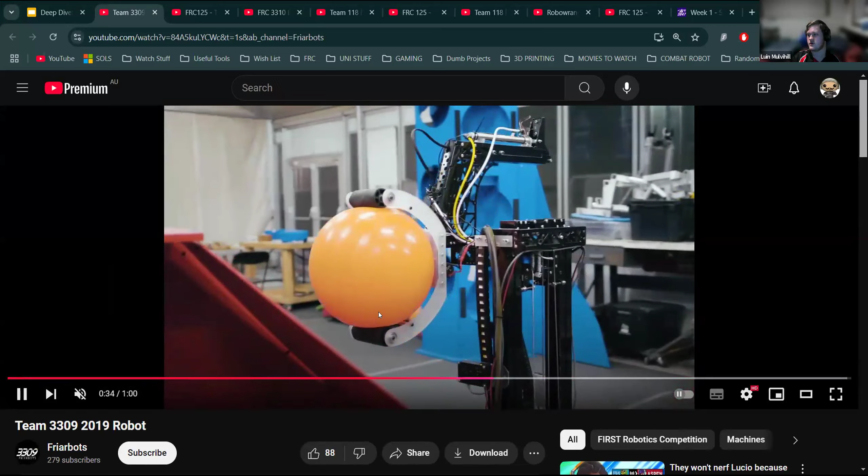This is 3309, the Friarbots, a 2019 robot. Where 118 had just their claw, or roller claw, in 2019, the Friarbots had an extra intake to get that little bit of extra reach and to protect their main scoring mechanism from damage outside the robot. If they took off that intake, they probably could intake anyway, as a bumper cutout. Yes, they would definitely be able to, but this just gives you the extra reach.

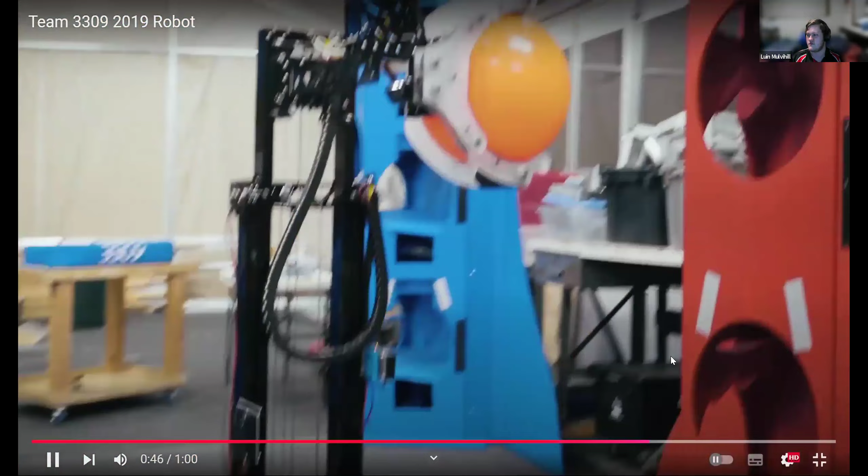You can see this is deployed using pneumatics. You have a piston — is this a piston? Yeah, it is. The pneumatic piston down the bottom has a very, very limited motion — a small throw piston.

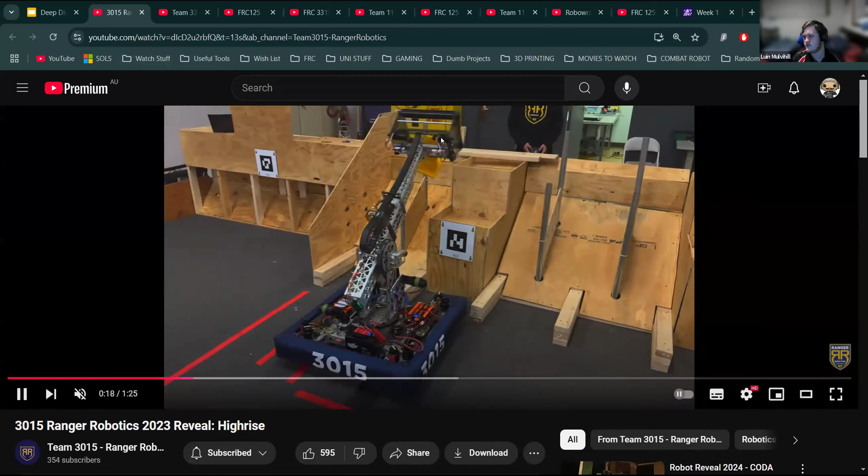Then we have cones. This is an example of a robot that thought, well, I don't want to make a claw because that's not very touch it, own it. So I'm going to figure out another way to pick these up. This robot had rollers to pick up the cones, and they were very fancy, able to pick up from the human player station as well, and angle that bottom part to angle the cone to score on the poles and receive from the human player station and the ground. It was also dual purpose for these inflatable cubes.

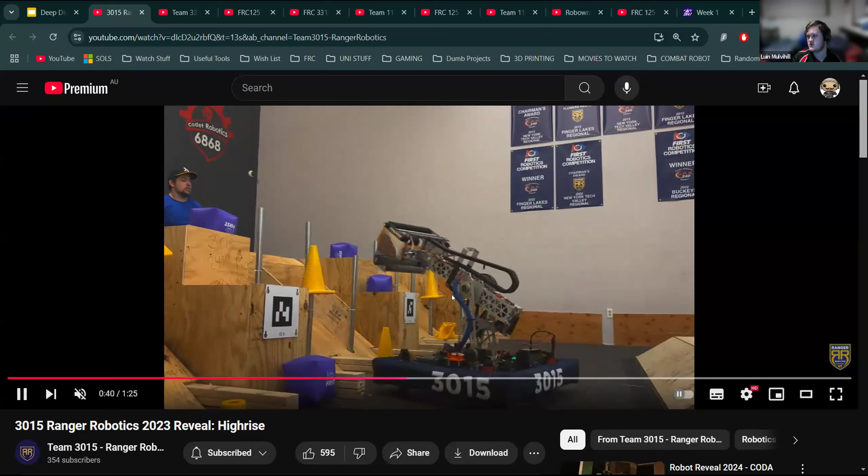Once again, rollers and wheels are very cool and should be your go-to rather than a claw. We should explain why a claw isn't really 'touch it, own it.' When you close the claw, you're touching the game piece and now you own it - that's technically correct. However, you need to be at the game piece and then close the claw. Whereas with any wheels or rolly grabby system, you can drive up to the game piece and it's already yours. You can just drive away without needing to close the claw first.

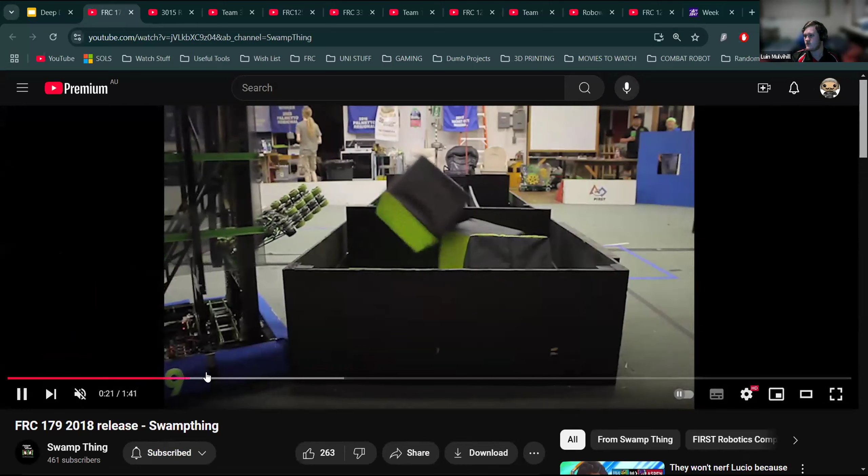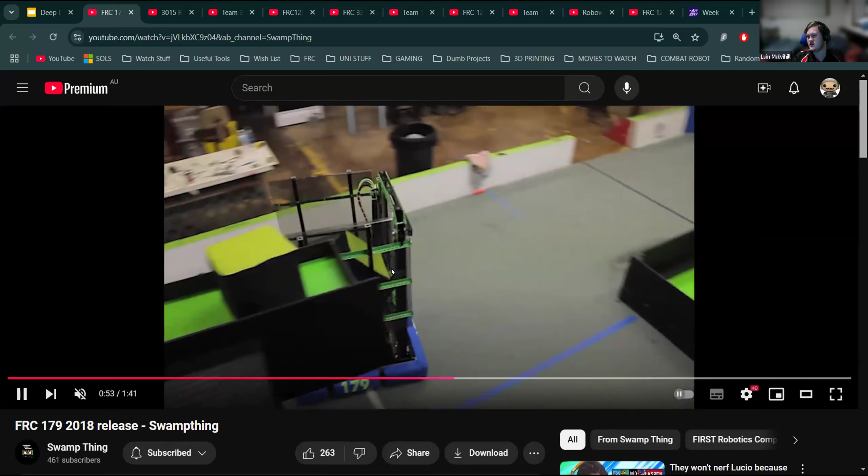And that gives you nice, quick control. Speaking of cubes, this is 179 - and speaking of rolly claws, this is the rolly claw of all rolly claws. They have a lot of wheels on here. Despite being a claw, they have a bunch of wheels on there to be able to intake the game piece a lot quicker, and they're able to shoot it out. That gives them a massive wide reach when they go to grab a game piece. This probably isn't the most 'touch it, own it' rolly grabber because they have it very wide when intaking, but I believe this is their autonomous routine, so it gives them a lot of margin for error.

You can see right there that despite their claw and center of their robot being way off picking up the game piece, they hit the inside corner. The wheels are able to bring it over and suck it into their control, and then they're able to close their claw and take it over to score.

And then I believe last but not least, sometimes teams will decide to be polar opposites. So in 2008, 148 decided, hey, I am not going to intake any game pieces. And then in 2018, they decided, hey, I'm going to intake game pieces, but then I'm also going to intake other robots. This year you got bonus points for having robots above about here - their bumpers had to be about here. So 148 decided that it was going to be good to be able to buddy climb with another partner, so that if a team wasn't able to climb, they would be able to bring someone up with them. You can see that it didn't really matter the size of the robot - they were able to lift them all the way up.

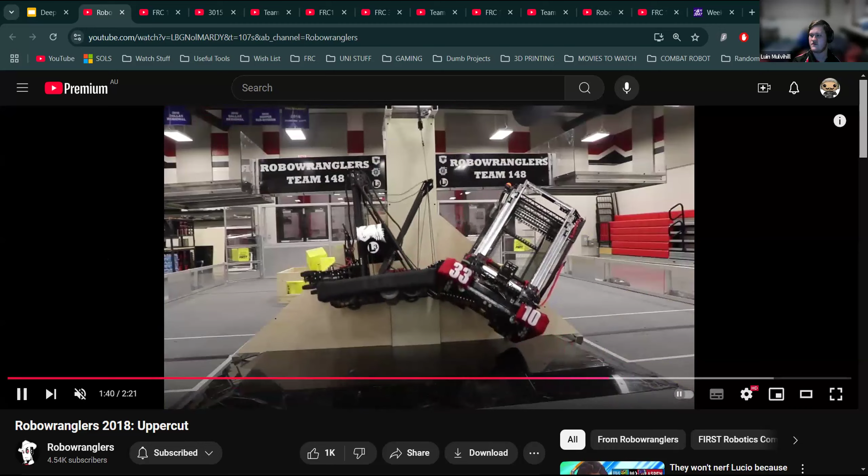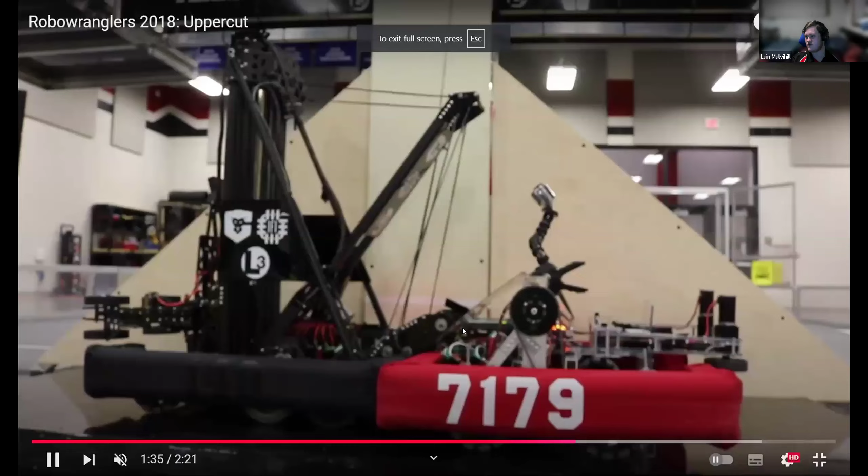This was then quickly named the Robo Wrangler for good reason - you're able to go around and wrangle whichever robot you choose. The team was also called the Robowranglers. So this doesn't actually intake the bumper of the other robot - it pulls in a piece of Velcro that is attached to the other robot, and then has plates underneath to be able to support the weight.

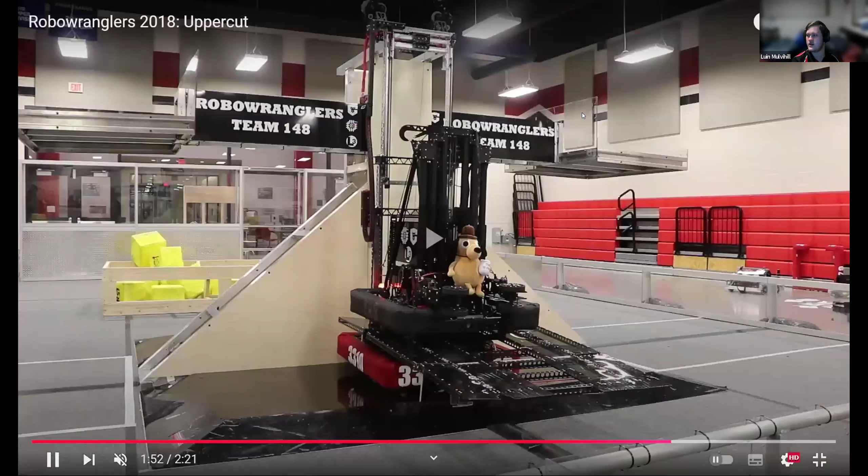This was similarly an idea that was done by 1678 in 2020/2021, and by 125, the NUTRONs, in that year as well. We attempted it this year with little success because we didn't know the key secret, which was to have the string running from the opposite side of the robot, not the side you were picking up. Once we figured that out, we tested it in-house and it worked. So disappointing that we couldn't get it during season, but we now know how it works for future seasons.

And there we go - that concludes our intake presentation, and we'll open it up for any questions that anyone may have about intakes.

While we're waiting for questions, Luin, did you want to explain the cross-section of the dead axle roller again? Yes, I think that was a question people were asking. Am I sharing the screen or the window? If I do this, do we still see it? Okay, you're sharing the window - do we still see the presentation? Yeah, that's the presentation there.